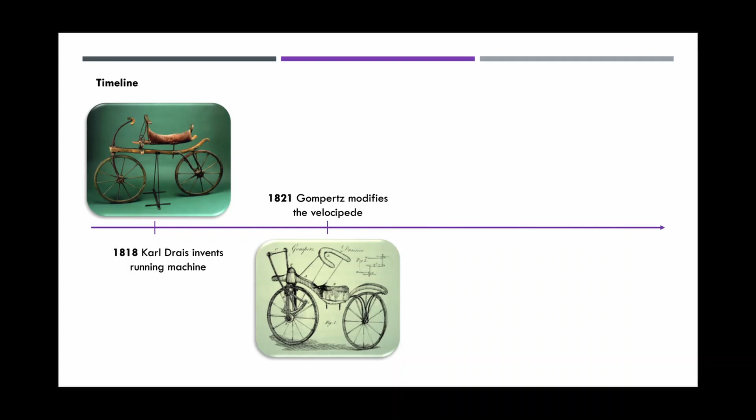In 1821, Gompertz tried to get around the dirty foot problem by adding footholds to his velocipede. He also added some hand levers to propel the bike, but this design didn't really catch on. In 1839, McMillan develops the back-wheel-driven bicycle. This machine was propelled forward by the rider's feet on the pedals.

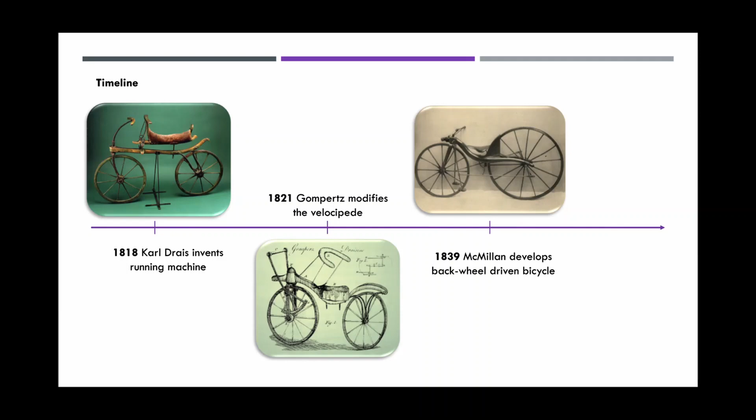In 1858, the Michauds patent the Michauline, with a wrought iron frame, wooden wheels, and pedals attached to the front wheel hub. You brake the bike by pressing back on the pedals. Two big issues arise when you attach pedals to the front wheel. When you turn, the wheel actually makes contact with your leg, which is a potential for injury, and it makes it really difficult to pedal and steer at the same time. Also, when going downhill, the pedals would spin dangerously out of control.

In 1866, James Starley invents the penny farthing. Made of steel and solid rubber tires, in the later 1870s they were modified for racing to be even lighter and faster, with a larger front wheel, which was easy to tip forward due to the seat position.

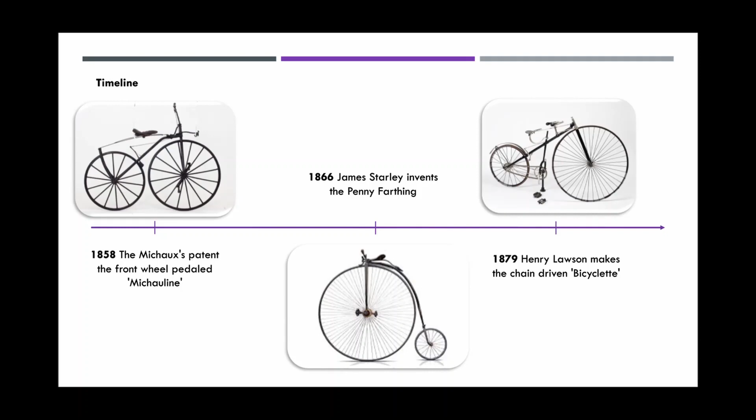In 1879, we get a bit closer to the modern-day bike with Henry Lawson's bicyclette. These are also known as safety bikes because they were definitely safer than the penny farthing in terms of headers. This has a chain attached to the rear wheel, and the seat positioning is further back behind the front wheel.

In 1885, J.K. Starley makes the Rover safety bicycle, getting even closer to the modern-day bike. The two wheels are really close in size. There is a front fork pivot. The seat is lower than high-wheelers, and a more reliable chain is present.

In 1892, the classic diamond frame bicycle with a saddle tube became popularized. The spring saddle helped with shock absorption for a smoother ride. The wheels were equal size, and pneumatic tires were being used widely. In 1898, the free wheel was widely adopted. This allowed people to rest from pedaling while keeping their feet on the pedals with the wheels still moving. This decreased the risk of injury from the pedals slamming into your legs.

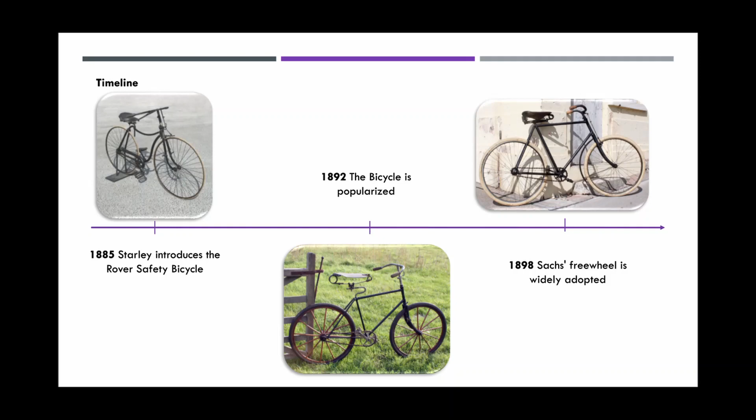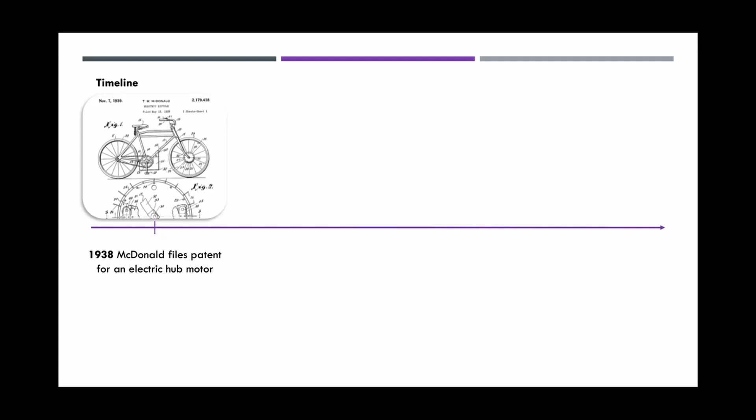Throughout the 1900s, there were many electric bike designs being developed, but the majority did not make it to production. One of these was in 1938, where Thomas McDonald files for one of the earliest examples of a bike with an electric motor mounted to the front wheel, but this didn't make it to production. In 1979, Joe Breeze develops a sturdier frame and a better suspension system for mountain biking.

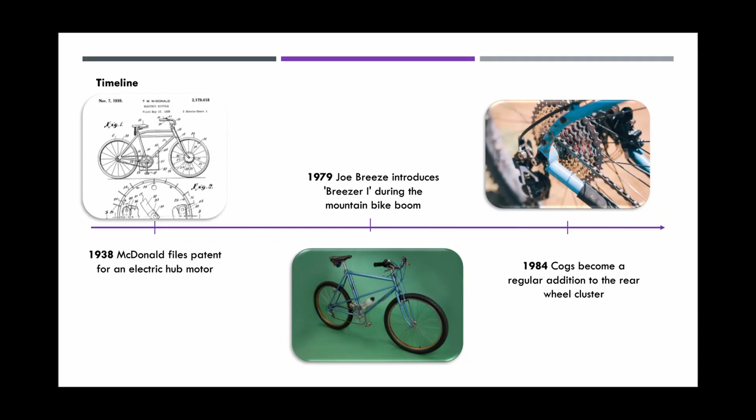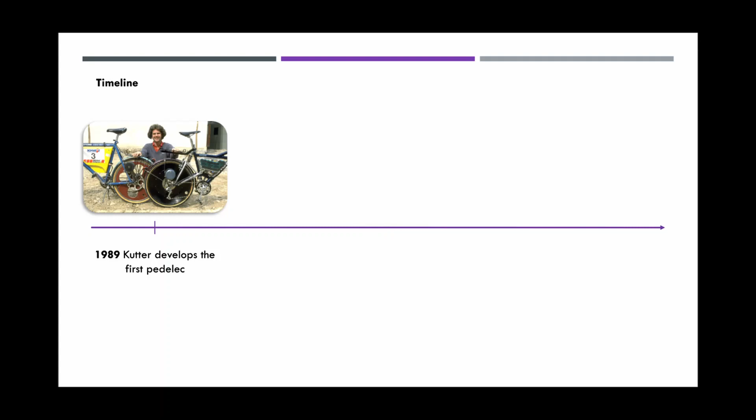In 1984, cogs, or gears on the rear wheel, are now regularly added to the rear gear cluster. Either called cassettes or freewheel clusters, these can increase the number of speeds from 15 to 18, 21, and 24. The first pedal electric bike, where pedaling causes the motor to assist the rider, was developed in 1989 by Michael Kutter.

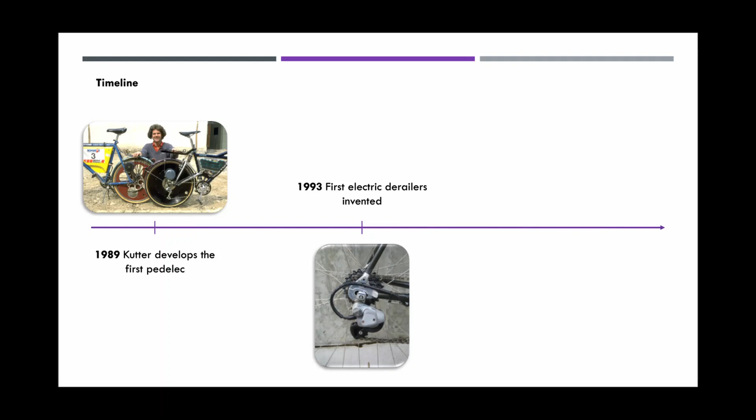In 1993, Mavic invented the first electric derailleurs. Derailleurs are devices that move the chain from one cog to another, assisting in gear shifting. These electric derailleurs allow the rider to make quicker and more accurate shifts. However, the first models didn't do very well in the rain. In 2009, Shimano introduced electronic gears, and when combined with better derailleurs, they enable you to skip multiple gears when shifting, and they're also better in the rain.

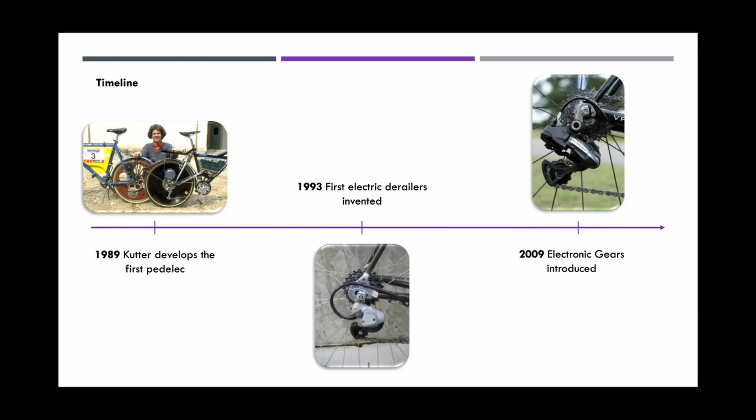In the past decade, road bikes have mostly changed in terms of materials to make them lighter and faster. Disc brakes have become a very popular form of braking, as they can handle much greater force due to stronger design. And the all-road bike was introduced, which has characteristics of road bikes, touring bikes, and mountain bikes that make it fast, comfortable, and durable. Bike packing has also become more popular as new racks are developed to distribute the weight across the bike.

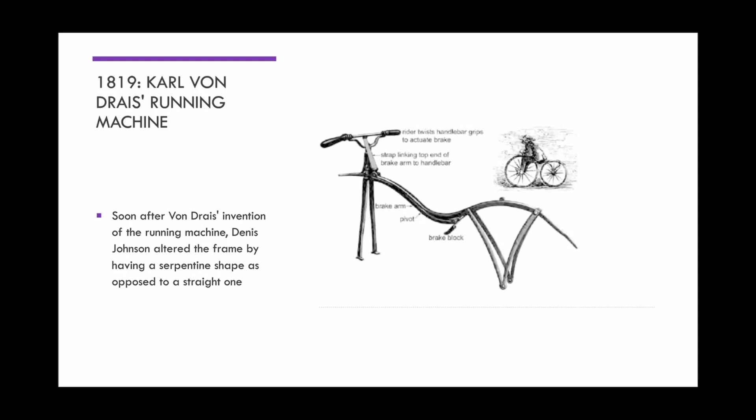Let's go back to the beginning to see exactly how and why the frame changed. Von Drais's original running machine had a relatively straight frame. However, soon after the invention, Johnson altered the frame by creating a more serpentine shape. This allowed for larger wheels, while the center straddle position remained the same.

In the 1860s, Michaux's velocipede used metal instead of a wooden frame, reducing the weight and allowing for more mass production. In 1868, the diagonal frame was found to be much stronger, and the frames broke far less with this shape as opposed to the serpentine one. In 1870, there were hollowed sections of steel, which allowed frames to be lighter and thereby allowed for smoother rides.

In 1879, Henry Lawson altered the shape of the high-wheeler to make it more practical. This time it had a single beam going down from the steering head to the rear fork, with a vertical seat tube going down to the pedal crank structure.

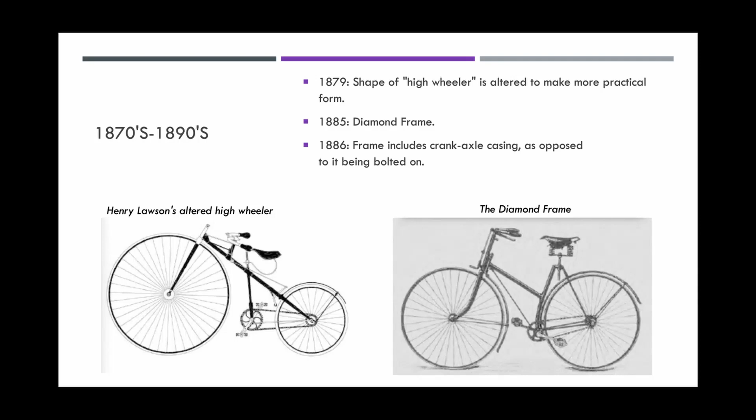In 1885, the diamond frame became the most common shape due to its durability. The top tube of the diamond frame was also slanted in some versions. The slant downward made the frame weaker and less triangulated, but it also allowed women to get on and off more easily with their skirts that were really common at the time.

By the late 1890s, diamond frames had evolved to the ones we primarily see today. They had straight steel tubes, a long wheelbase, a bottom bracket that was part of the frame, a roller chain driving the rear wheel, and wheels equal in size. Steel tubing also became the prevailing material used to build frames, making them light and strong.

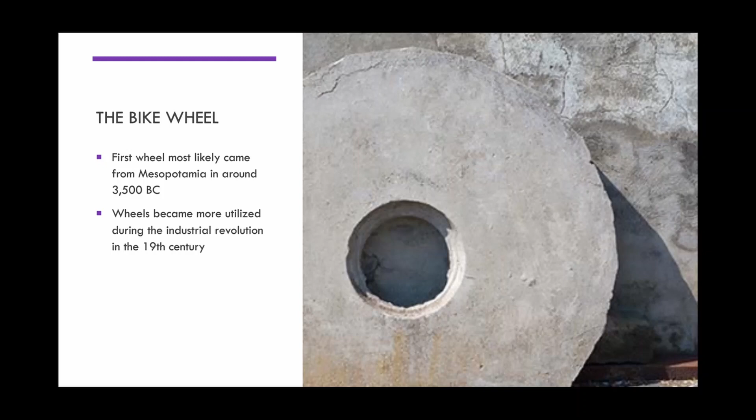Now let's dive into the evolution of the wheel. The wheel most likely originated in Mesopotamia around 3500 BC. During the Industrial Revolution in the 19th century, advancements in technology allowed for the wheel to be utilized in human-powered machines. A bike that is basically all wheel, the penny farthing has a huge size disproportion between the front and the back wheel. One pedal rotation is equal to one rotation of the large wheel.

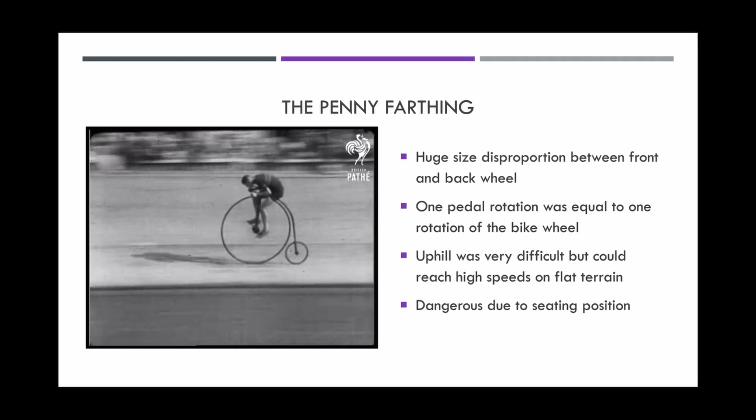This made going uphill a real challenge, but it was very easy to go fast on flat zones. Because the cyclist was so high off the ground and perched just above the wheel, it was really easy to do a header or fly head first off of the bike. So this made the penny farthing a really dangerous machine. The safety bike with two wheels of equal size greatly reduced the risk of headers.

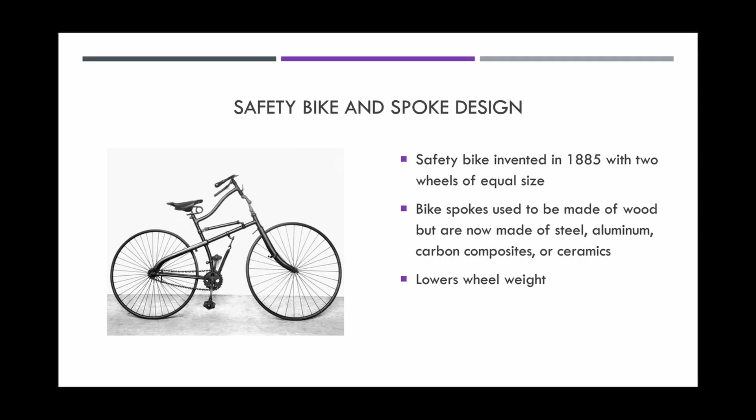The spokes on these bikes used to be made of wood, but are now made of steel, aluminum, and carbon composites, which lowers the wheel weight. This is important because every time you push the pedals, you have to accelerate the weight of the wheel forward around the center, which is increasing the angular and linear motion simultaneously.

Tires were made first of leather, then solid rubber attached to a wooden or metal rim. In 1888, pneumatic tires, or air pressurized tires, were added to biking, and this improved the experience greatly as it smoothed the ride even more.

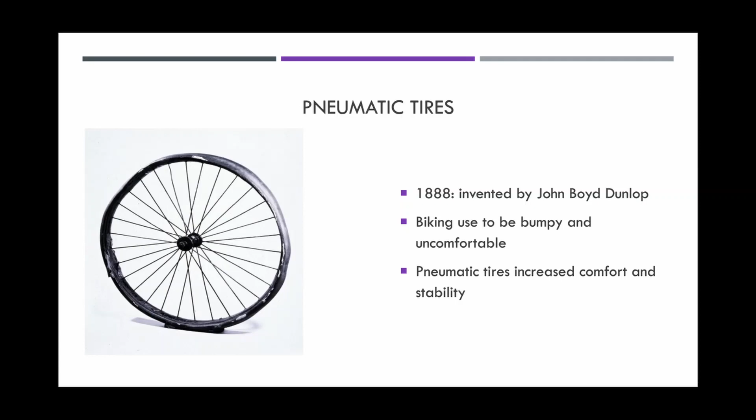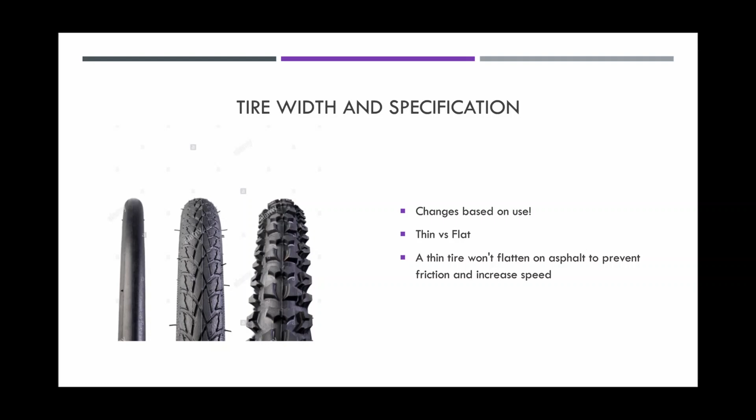Depending on the environment that one bikes in, the tire width needs to change with that environment. A thinner tire on asphalt won't flatten as much. This means there's less surface area on the road, causing less friction, which results in higher speeds. Fat tires, on the other hand, flatten more on asphalt. On dirt, they float on top of the surface. Thin tires, however, would dig themselves a hole in the dirt.

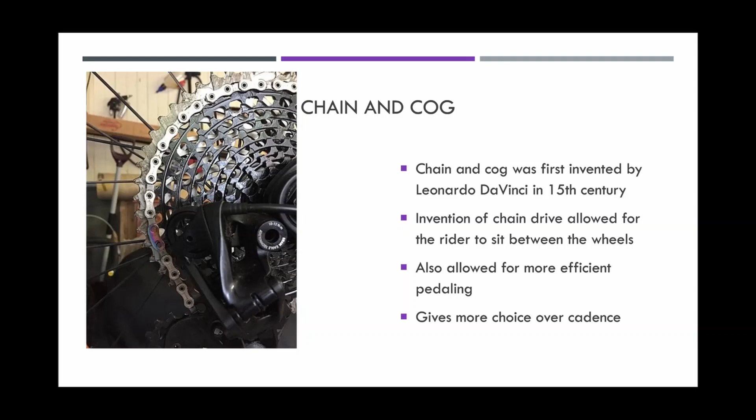The addition of the chain and cog to the bicycle allowed for much more efficient pedaling. It allowed you to go faster, it was easier to pedal uphill, and it ultimately allowed more choice over cadence. Bicycle designs of the future might be letting go of the design that we're so accustomed to, such as the seat tube or the frame.

Not only will we see integration of technology into bikes, but we'll also see the continued efforts to create even lighter bicycle designs, if that means lighter frames or taking out the spokes entirely. This will enable faster speeds and a more efficient ride.